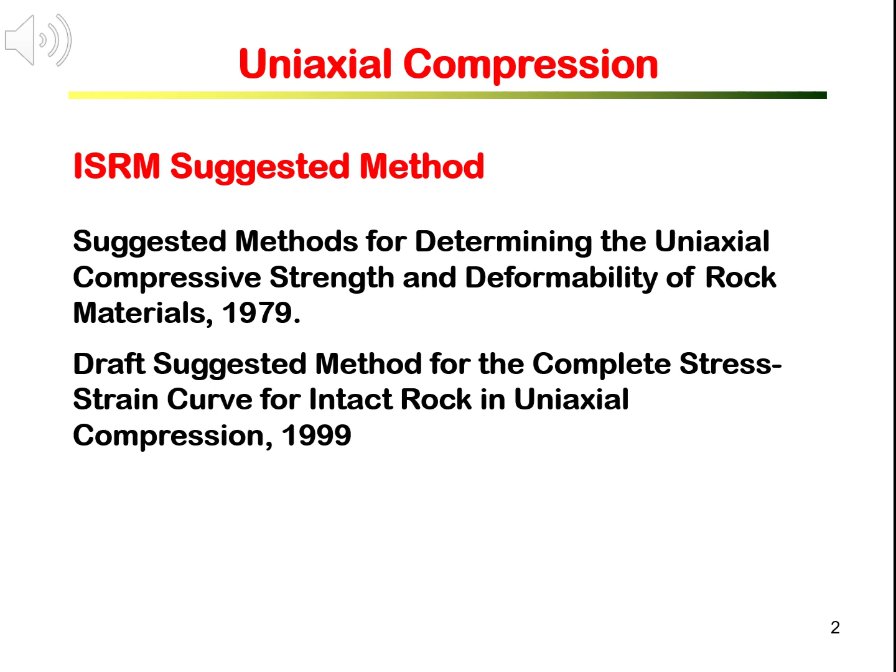Compression test is to be performed on a compression machine. The compression machine is a loading machine providing axial compressive load of large loading capacity sufficient to break the rock. Because of the relatively high strength of rock, the machine should be strong and stiff. Usually, the loading should be controlled either manually or, more advanced, by servo controller.

Specimens for testing need to be properly assembled with measuring sensors to ensure the specimen is loaded properly and the load and deformations are measured. We'll elaborate on the specimen assembly in the next slide in more detail. Then, of course, there must be a data acquisition and control system. This is to record the measurements on load and deformations and to control the loading. We will cover more details on the servo control system later.

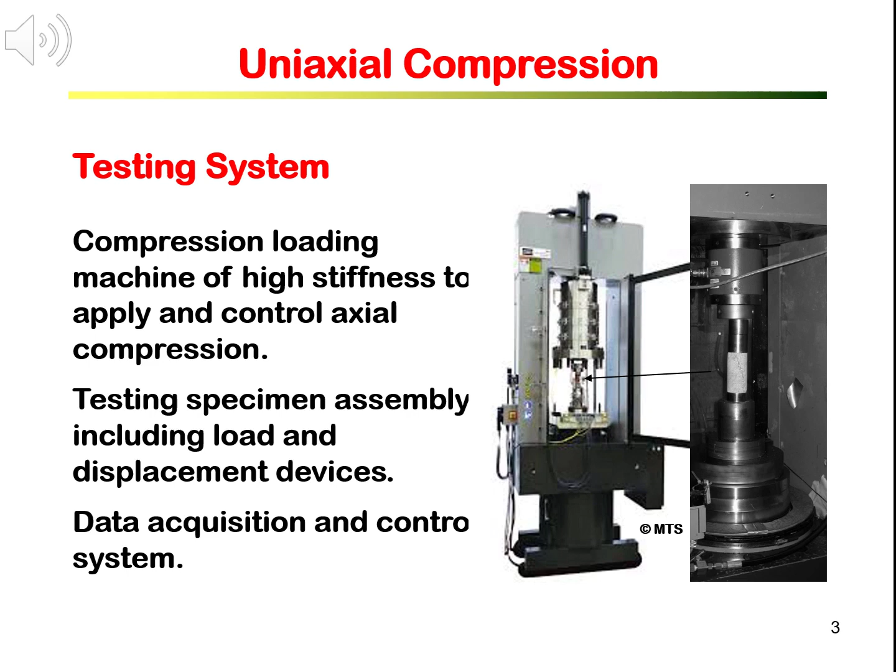In the ISRM suggested method, there is quite a strict requirement on rock specimen assembly, particularly on spherical seating. Rock specimens are typically rock cores cut into cylinders with length 2 to 3 times the diameter. For example, if the core diameter is 50, the length should be 100 to 150 millimeters.

The specimen should be sandwiched between hardened steel platens. The steel platens should have spherical seating. The spherical seating is to ensure uniform loading on the specimen in case the specimen ends are not parallel.

We will need to measure deformation of the specimen during loading in order to calculate the Young's modulus and the Poisson's ratio. Therefore, there should be measuring sensors for axial and lateral displacements, by either strain gauges or LVDTs. We will explain a bit more detail on how to use strain gauges and LVDT devices in the next slide. Measuring the axial loading is usually by load cell, normally built into the compression machine. If not, then a load cell should be attached to the specimen assembly for axial load measurements.

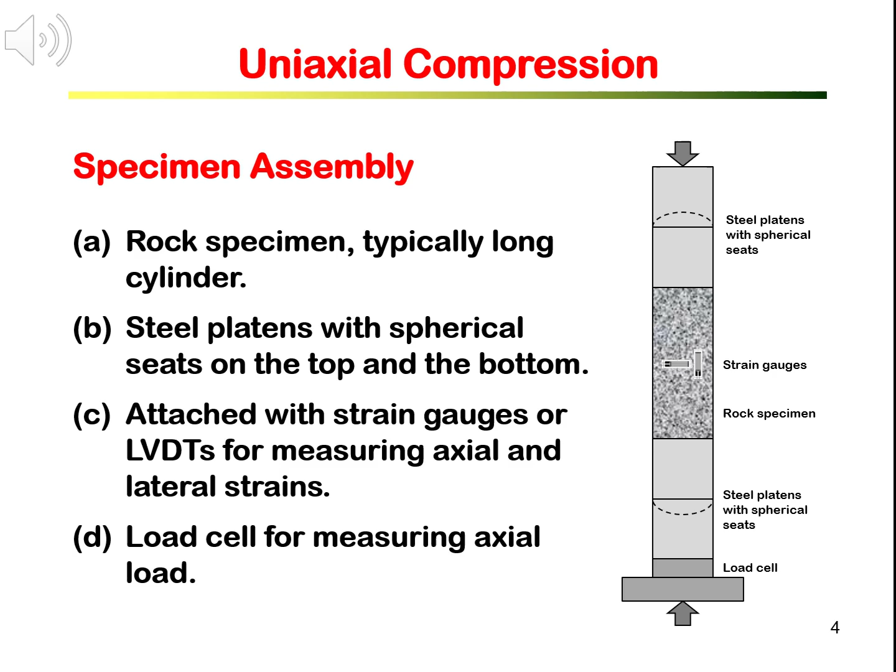If strain gauges are used for specimen deformation measurements, they must be glued on the specimen surface at mid-height. Usually we need a minimum of 2 sets of strain gauges on opposite sides of the cylinder. The upper right figure shows the strain gauges glued on the rock surface in the middle of the specimen cylinder. The vertical gauge measures axial strain, and the horizontal strain gauges are for lateral or radial strain. You should have another set of strain gauges glued the same way on the other side of the specimen cylinder at mid-height. You can attach more strain gauges, but they should be spaced equally.

If you only want to measure axial strain, meaning you will only be able to calculate the Young's modulus but not the Poisson's ratio, then you can attach only the vertical strain gauge. You still need to glue at least 2, on opposite sides.

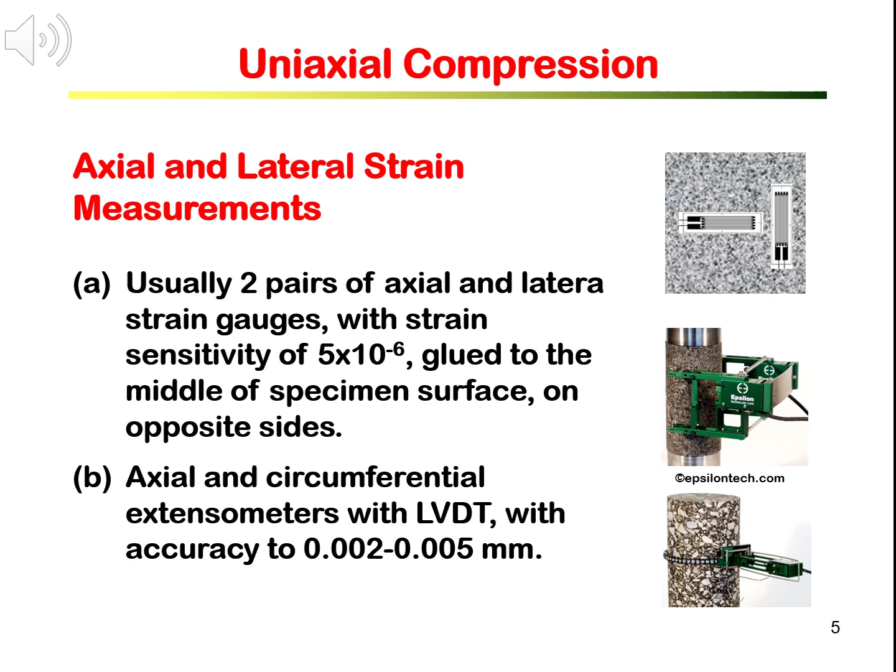Modern compression machines are equipped with a servo-controlled loading system. The servo-controlled loading system uses a measurement, load or displacement, as feedback to inform and control the hydraulic loading system to increase or decrease the loading in order to maintain prescribed values in the feedback control loop. The typical arrangement of servo control is illustrated in the figure here. Feedback measurements can be axial load, axial strain, or diametrical strain.

Based on the feedback signals, the controller will make adjustments to close the gap between the current value and the desired value, sending control signals to the servo valve, which in turn controls the loading. Through this closed loop, the loading is expected to adjust by increasing or decreasing to ensure the feedback measurement follows closely the prescribed or desired value. For example, if we want to make sure the specimen has a continuing axial strain of 5 microns per second.

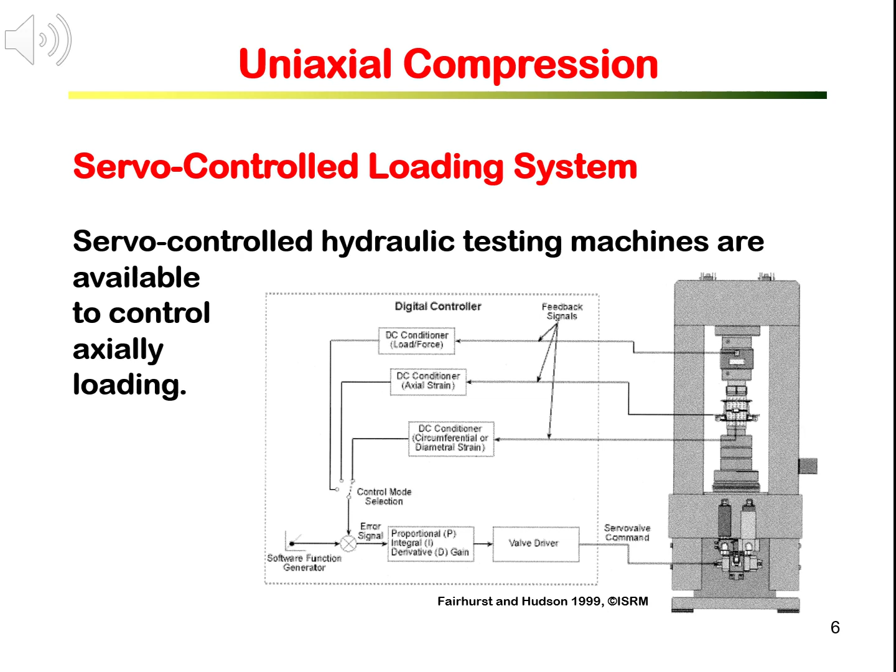Now let us start with specimen preparation. You should select the specimen carefully to make sure the specimen for testing is intact, homogeneous, and has no visible defects.

If you are selecting the specimen from rock cores, make sure the portion of core you cut for testing is good, solid, and intact, with no cracks and no other discontinuity features. Usually, specimens are cut from cores. Sometimes, a specimen can also be cored from a rock block.

The specimen should be a right circular cylinder with diameter preferably not less than 50 mm, and the height to diameter ratio of 2 to 3. Rocks such as granite have minerals of coarse grains, so the diameter should be at least 10 times the maximum grain size.

The two ends of the specimen must be cut and ground to be flat, smooth, parallel, and perpendicular to the specimen axis. The sides of the specimen should be smooth and straight within 0.3 mm tolerance, and there should be no visible irregularities such as voids and pores.

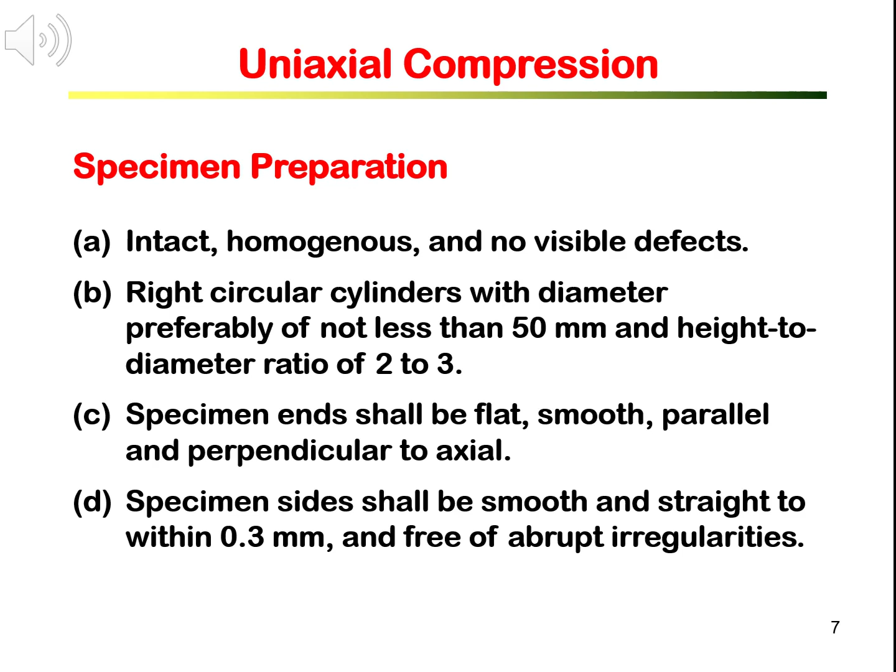To start the test, make sure you measure and record the specimen dimensions, densities, and water content conditions. In terms of dimensions, you will need to measure the diameter and length several times at different locations, for example, diameters at different heights of the specimen.

Water content should be recorded as room dry, saturated, or natural condition.

Attach the axial and lateral strain gauge measurement devices to the specimen as we have learned on slide 5. Place the specimen assembly as shown in slide 4 in the compression machine, centered with the axial loading piston.

Then we can start applying axial load to the specimen assembly continuously at a constant stress rate of 0.5 to 1 megapascal per second, or to make sure it will reach failure in 5 to 10 minutes.

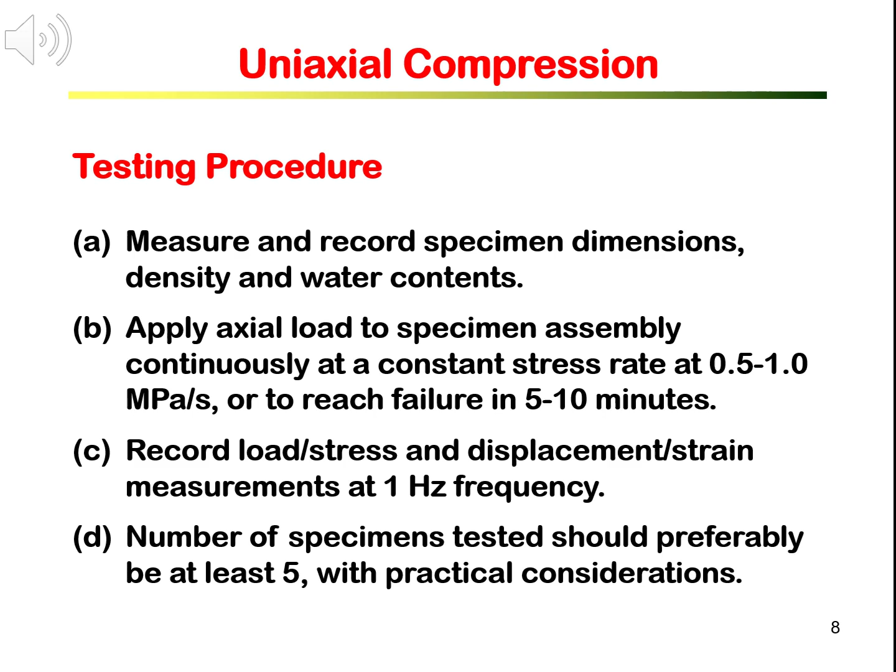You can skip slide 9 and slide 10 if you are not interested in obtaining the post-peak stress strain curve. In most engineering applications, design parameters only require peak strength, Young's modulus, and the Poisson's ratio.

The procedure to obtain the post-peak stress strain curve requires a servo-controlled loading machine with feedback channels from axial load, axial strain, and circumferential strain. Again, the specimen and specimen assembly with strain measurements are positioned in the servo-controlled loading machine.

We start with using axial load as the feedback control to apply an initial axial stress to approximately 10% of the peak strength. The specimen is now in the elastic behavior region.

We now change the feedback control to axial strain control and set the axial strain rate at 0.001 per second.

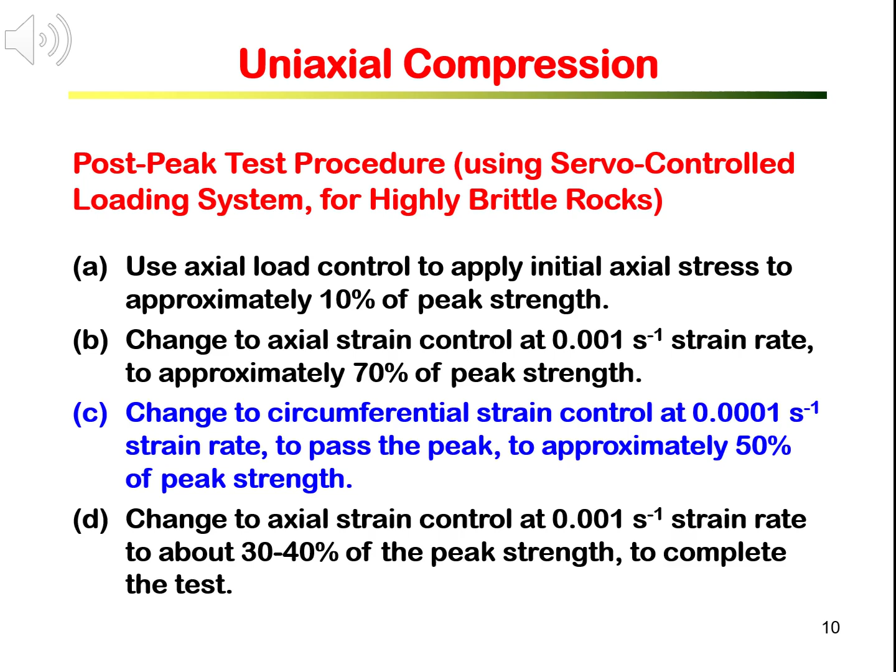As we mentioned earlier, during the test, measurements on load or stress, axial and lateral strains or displacements are recorded at a frequency of 1 Hz by the computer data recording system. The computer will easily generate the axial stress, axial strain curve from the recorded data.

You can ask the computer to produce a linear curve through the data regression, which will make the curve easier to see and analyze. You can get the uniaxial compressive strength and the Young's modulus from this axial stress axial strain curve.

The computer can also plot the axial stress lateral strain curve. You can calculate the Poisson ratio as a ratio of the tangents of the axial stress axial strain curve to the axial stress lateral strain curve.

We usually calculate the Young's modulus and the Poisson ratio at 50% of the peak strength, which ensures the rock is in the elastic region.

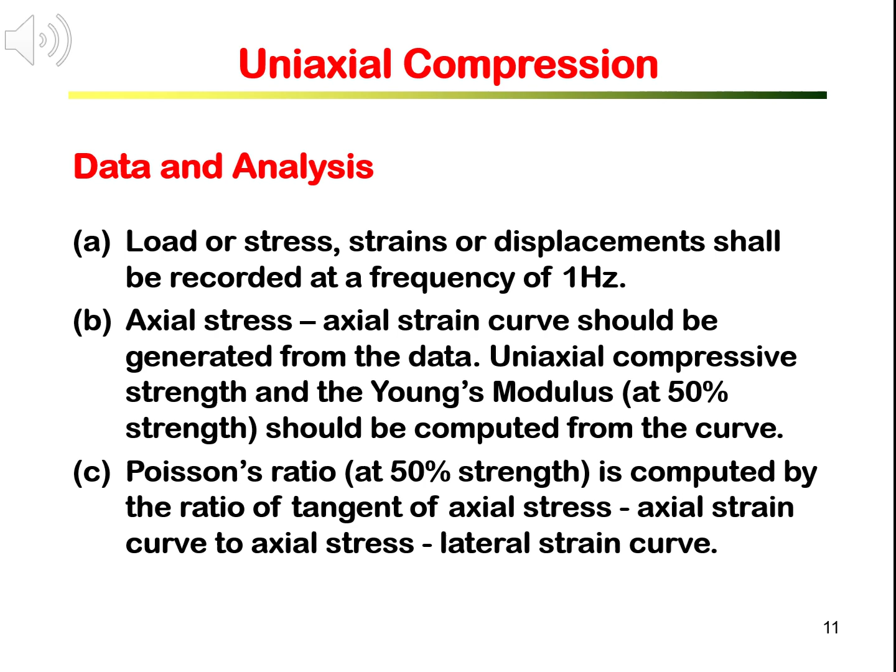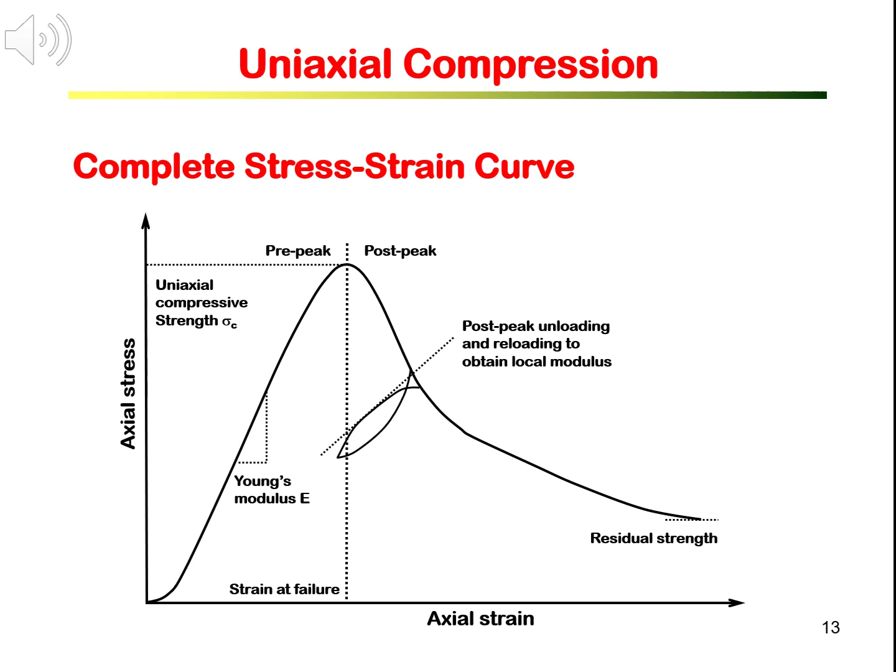To report the uniaxial compression tests and the uniaxial compressive strength, the following information should be included in the report. A. Rock sample information, including lithological descriptions, grain size, rock anisotropy, sample locations and depths, sampling date and method, storage history and the environment.

B. Specimen information, such as number of specimens, methods of specimen preparation, measurements of size, and water content observations. C. Date of testing and the test duration, number of specimens tested, machine information, test procedure, including descriptions of loading control.

D. Values of applied force, stress, and strain as tabulated results or as recorded on a chart. Stress strain curve generated or plotted by the computer from the recorded data. E. Uniaxial strength, Young's modulus and Poisson ratio at the 50% stress level, the average values and also the range of those strengths, modulus, and Poisson ratio.

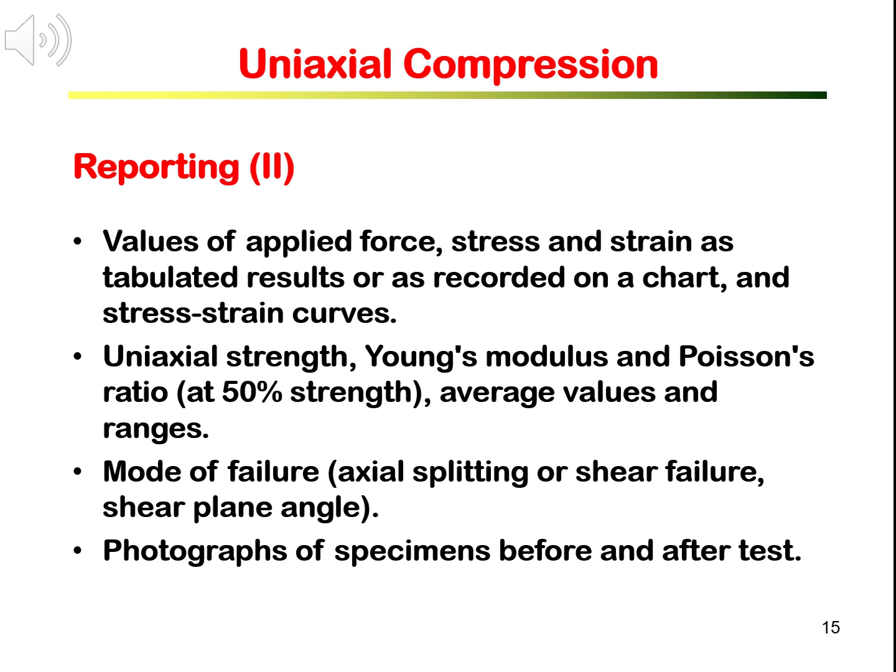Triaxial compression tests are similar to uniaxial compression tests, but with additional confining circumferential stress. This is to measure the rock strength on the ground, which is subject to in situ confining stresses. The test method for triaxial compression tests is documented in the ISRM suggested method for determining the strength of rock materials in triaxial compression, published in 1978.

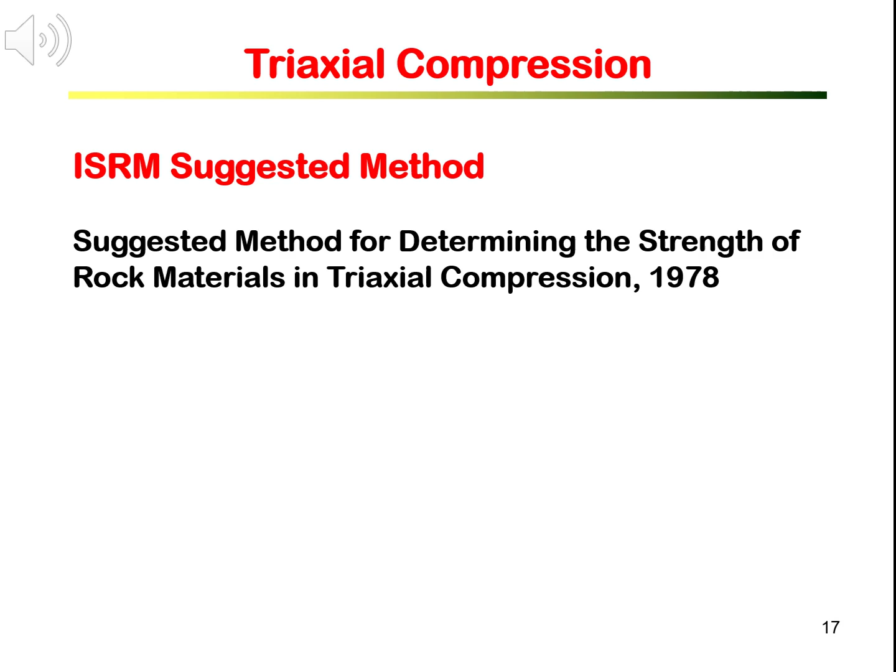We'll explain the triaxial cell in more detail in the next slide. Through the cell, confining pressure is applied, commonly by hydraulic compressed oil. The test system is linked with a data acquisition and control system, similar to that of uniaxial compression. It can also have a servo control system for the triaxial compression test.

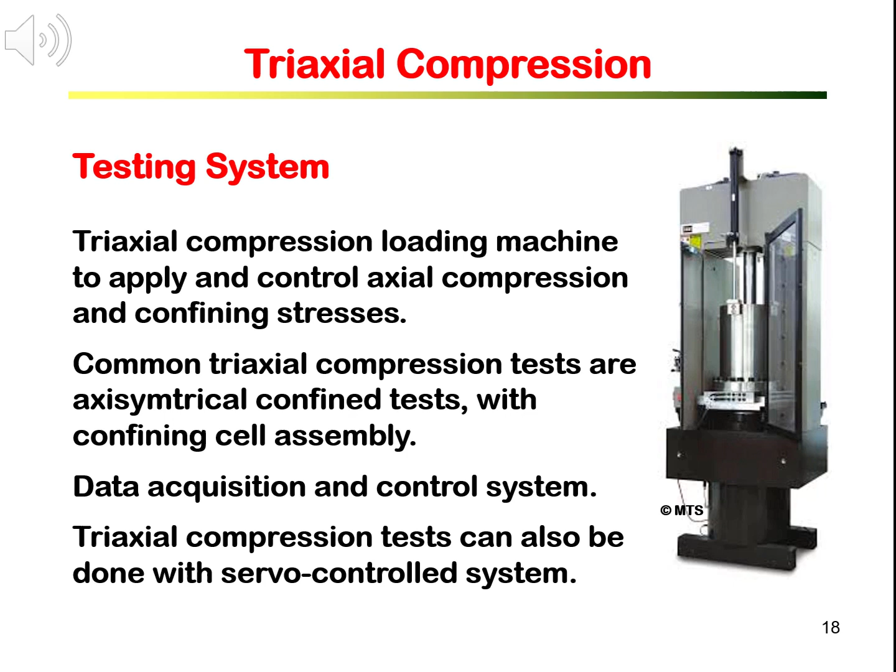The specimen assembly inside is the same as in uniaxial compression, with spherical seated platens and strain gauges. The specimen assembly is confined by a rubber sealing sleeve around the circumference and sealed inside the triaxial cell. Oil is injected into the cell through the oil inlet, filling the gap between the cell body and the rubber sleeve. The oil pressure on the rubber sleeve is transmitted to the specimen as a confining pressure.

As a triaxial cell has similar working principles, the rock specimen assembly is sealed by usually a rubber sleeve or jacket inside the triaxial cell. The triaxial cell is then filled and pressurized with oil to generate confining pressure. Some advanced triaxial cells can incorporate heat devices for testing the rock specimen at elevated temperature.

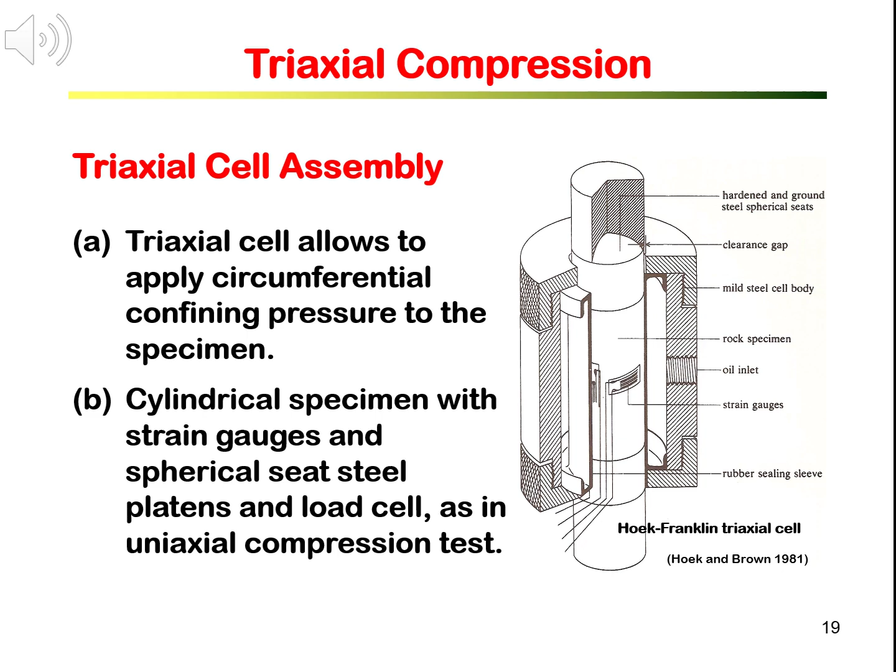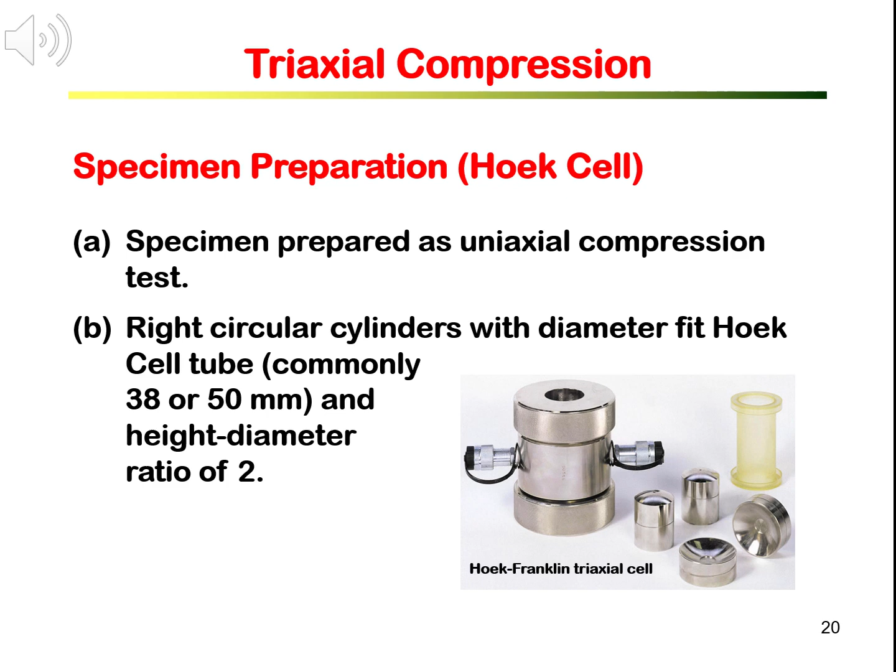Testing procedure described here is using the Hoek cell. First, we need to measure and record the specimen diameter and length a few times at different heights and sides. Then measure the weight and record the water content condition. Attach the axial and lateral strain gauges to the specimen.

Place the specimen into the rubber sleeve and the triaxial cell. Attach steel platens to the specimen, then place the triaxial assembly in the compression machine, centered with the axial loading piston. Connect strain gauge wires to the data logger.

We first apply a small axial load to the specimen assembly. This is to fix the triaxial assembly in place and keep it from moving around while pressurizing the triaxial cell. Then we apply axial load and the confining pressure slowly and simultaneously, to ensure axial stress is always slightly higher than confining pressure, until confining pressure reaches the prescribed pressure value.

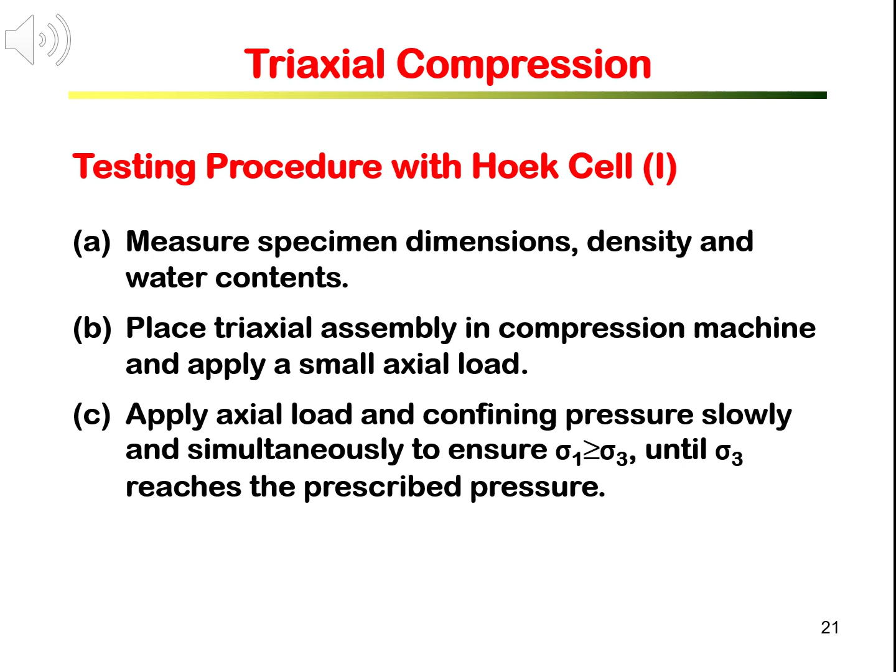Then we continue to apply axial load to the specimen at a constant stress rate of 0.5 to 1 megapascal per second, or to fail the rock in 5 to 10 minutes. Throughout the axial loading, confining pressure in the triaxial cell should be maintained within 2% of the prescribed value. While loading, record load or stress and displacement or strain measurements at 1 Hz frequency.

If post-peak stress strain data is to be obtained from the test, you can use the same approach as in the uniaxial compression test for the post-peak test with a servo-controlled loading system.

For other types of triaxial cell, you need to follow the instructions on the specimen assembly in the triaxial cell. Make sure sample seating, cell seating, and sensor connection are correct. While applying the confining pressure, always make sure that the axial stress is greater than the confining pressure.

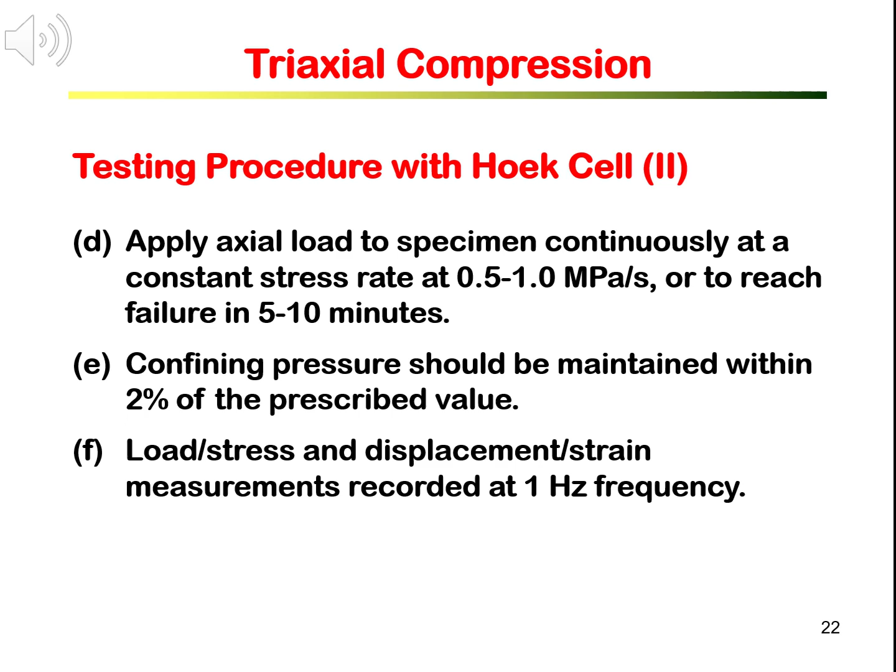During testing, axial load, confining pressure, axial and lateral strain are recorded at a frequency of 1 Hz by the computer data recording system. You can generate the axial stress, axial strain curve from the recorded data. From the curve, the triaxial compressive strength and the Young's modulus can be determined.

You can also generate the axial stress, lateral strain curve. Together with the axial stress, axial strain curve, you can calculate the Poisson's ratio as a ratio of the tangent of the axial strain curve to the lateral strain curve. It is recommended to calculate the Young's modulus and Poisson's ratio at 50% of the peak strength.

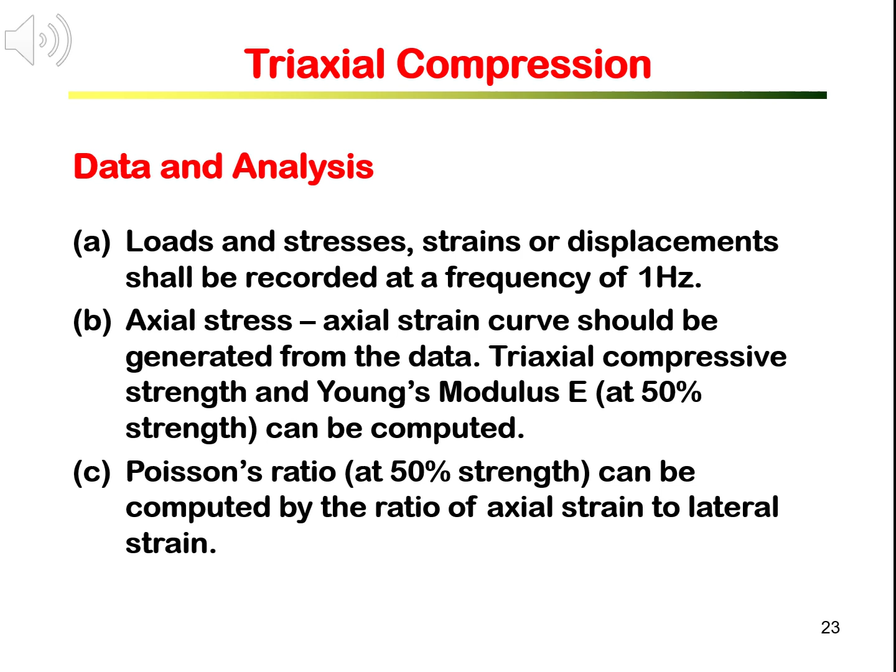The pre-peak axial stress, axial strain curve and axial stress, lateral strain curve of a triaxial compression test is similar to that of a uniaxial compression test. From those curves, we can graphically determine the triaxial compressive strength at a fixed confining pressure.

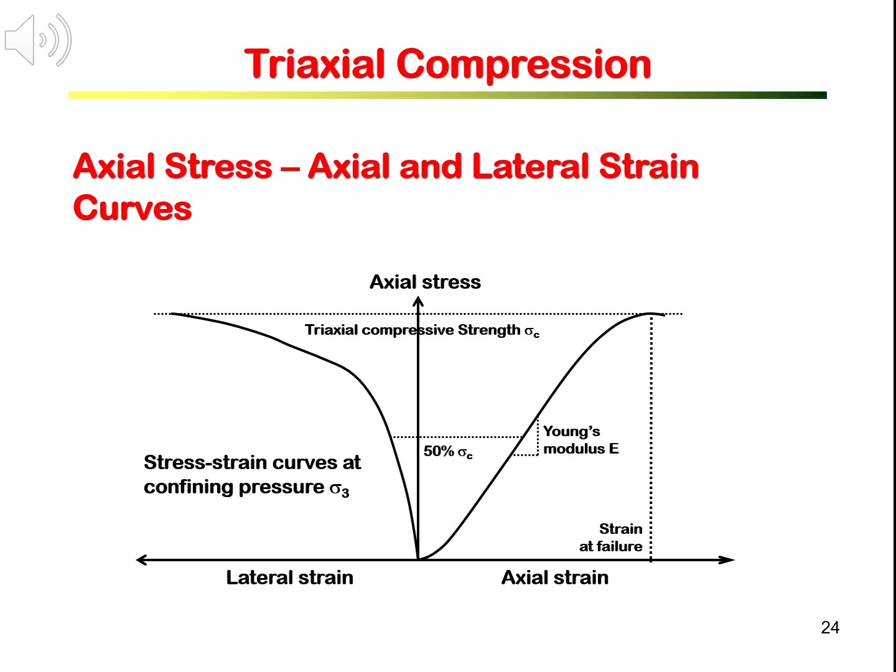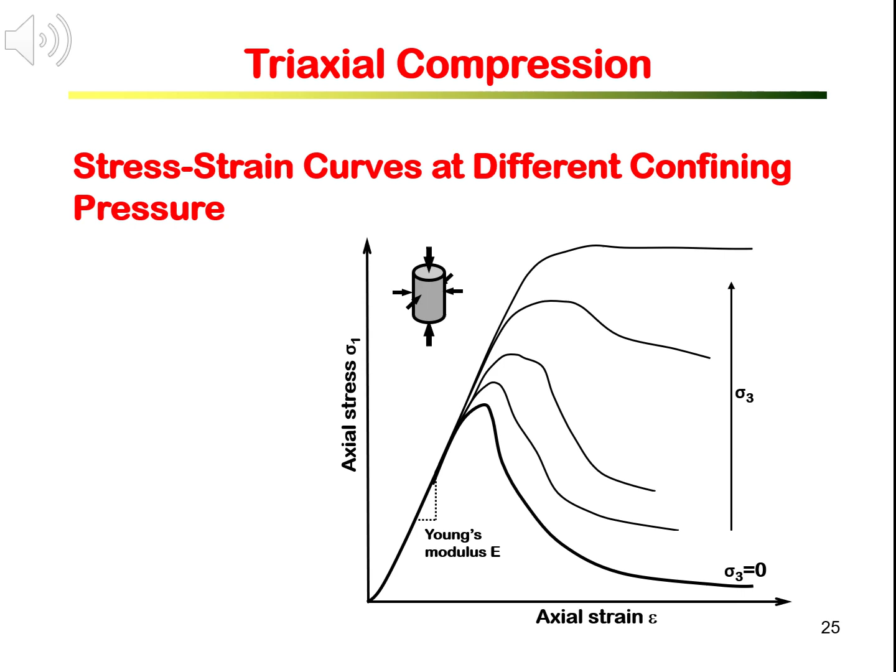Experimental report on triaxial compression tests should cover the following aspects and information. A. Rock sample information, including log type, and lithology, grain size, anisotropy, sampling location and depth, method, and date, and storage information.

B. Specimen descriptions and measurements, including number of specimens, method of specimen preparation, diameters and lengths, and water content conditions.

C. Test date and duration, number of specimens tested, machine information, testing procedure, including descriptions on axial stress and confining pressure loading procedure and control.

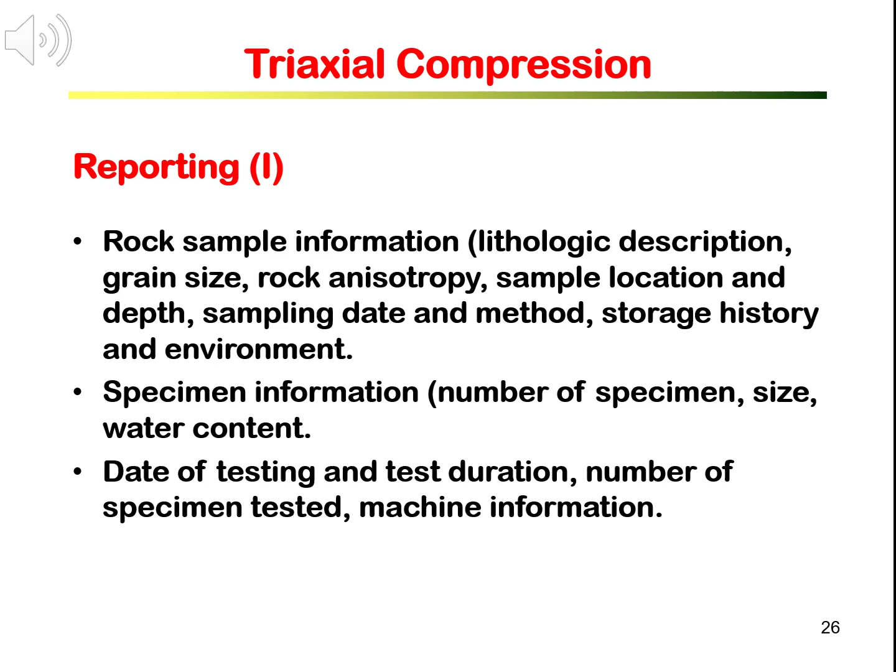D. Data and graphs from the tests, such as recorded stress and strain data, stress strain curves generated by or plotted by the computer from the recorded data.

E. Tabulated results on triaxial strengths, Young's modulus, and the Poisson ratio, generally at 50% of the strengths, with confining pressure, including average values and ranges.

F. Mode of failure, whether the failure is axial splitting or by shear failure, and the measured shear plane angle.

G. Photographs of the specimen prepared and the specimen after failure, as well as the compression machines and the triaxial specimen assembly.

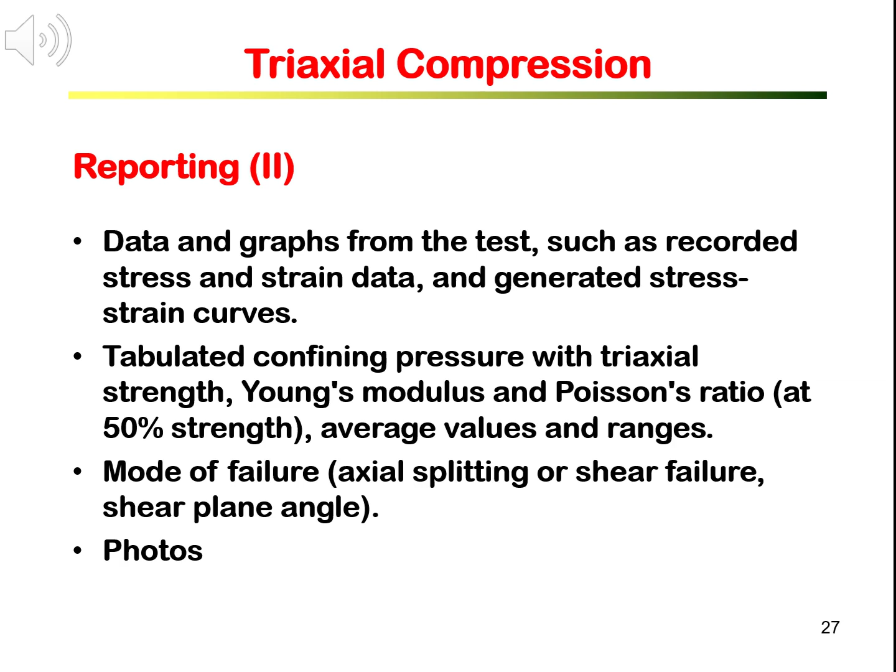The main objectives of determining uniaxial and triaxial compressive strengths are to obtain the strengths at a specific stress condition, and more importantly, to construct a strength criterion for design and modeling.

This session 5.3c is to illustrate how to determine the parameters of strength criteria used in rock mechanics and rock engineering.

We will use the uniaxial and the triaxial compressive strength results obtained from the tests to derive the parameters for the Mohr-Coulomb strength criterion and the Hoek-Brown strength criterion.

The method used to determine the strength parameters is quite simple, by plotting the Mohr circles and doing the regression analysis.

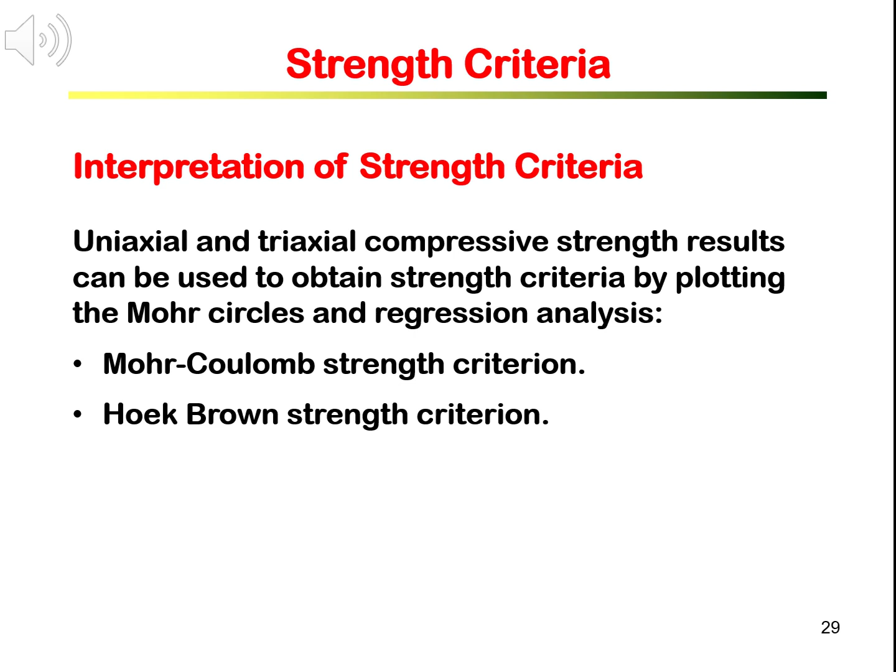For the Mohr-Coulomb strength criterion, what we need to determine is the cohesion C and the internal friction angle phi.

First, we plot the triaxial and uniaxial compressive strengths by the Mohr circles and draw the best fitting tangent straight line to represent the Mohr-Coulomb strength envelope. From the strength envelope, we can find the cohesion C and the internal friction angle phi for the Mohr-Coulomb strength equation.

We learned in session 2.5 that the Mohr-Coulomb equation gives much higher tensile strength. Therefore, we use the actual tensile strength obtained from the test as the cutoff for the strength envelope on tension.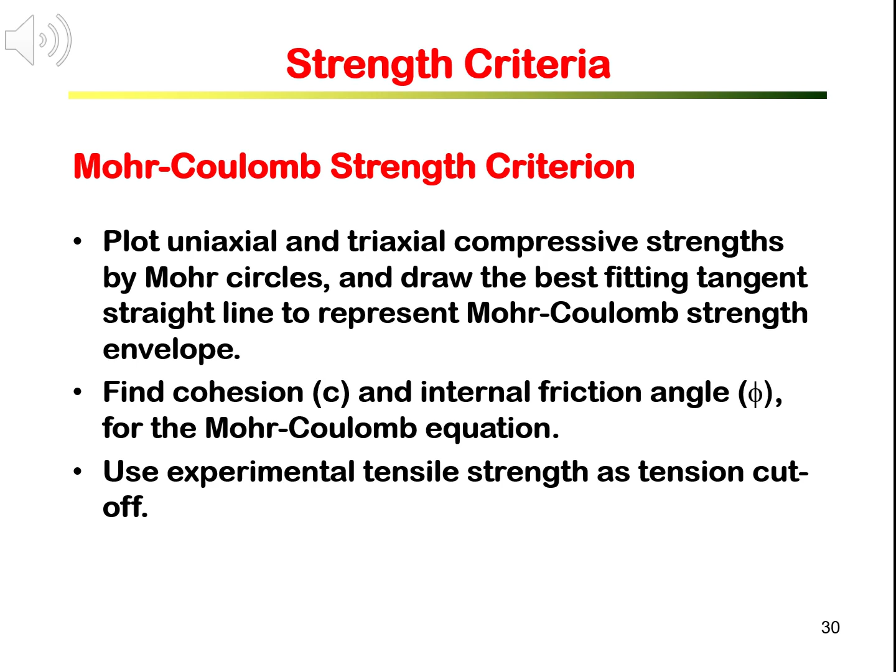The Mohr-Coulomb strength envelope is a cutoff to the tensile strength determined from the test, or to the value of 10% of the uniaxial compressive strength.

With C and phi, we can determine the strength of the rock material at any confining pressure using the Mohr-Coulomb strength equation.

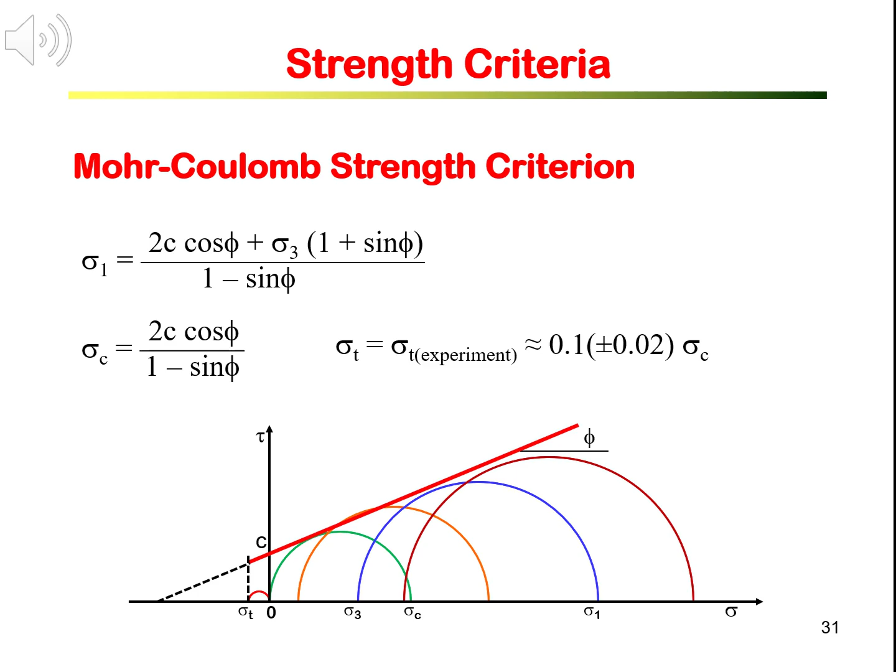We can also determine the parameters for the Hoek-Brown strength criteria. Again, we draw the Mohr circles using the uniaxial and the triaxial compressive strengths and the tensile strength from the tests. And then draw the best smooth touching curve to represent the Hoek-Brown strength envelope.

For each set of sigma 3 and sigma 1 from the test, using the Hoek-Brown equation, sigma 1 equals sigma 3 plus the square root of m sigma c sigma 3 plus sigma c squared. With the value of sigma c obtained from the test, we can calculate parameter m for each set of sigma 3 and sigma 1.

We will obtain a series of m values, and the mean value of those m is used for the Hoek-Brown equation.

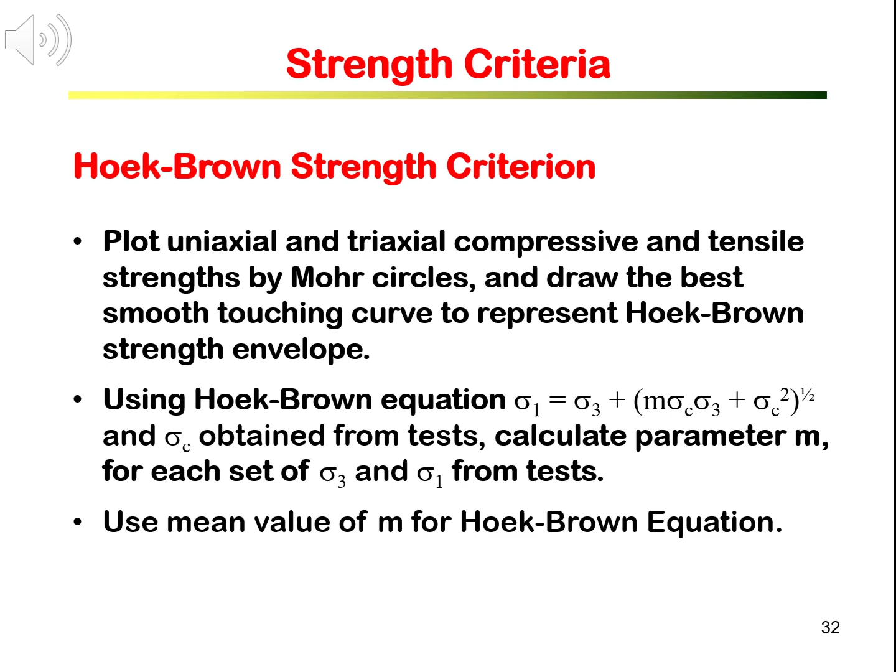You may wish to revisit session 2.5 and 2.7 on the Mohr-Coulomb strength criteria and the Hoek-Brown strength criteria in combination with the exercise here.